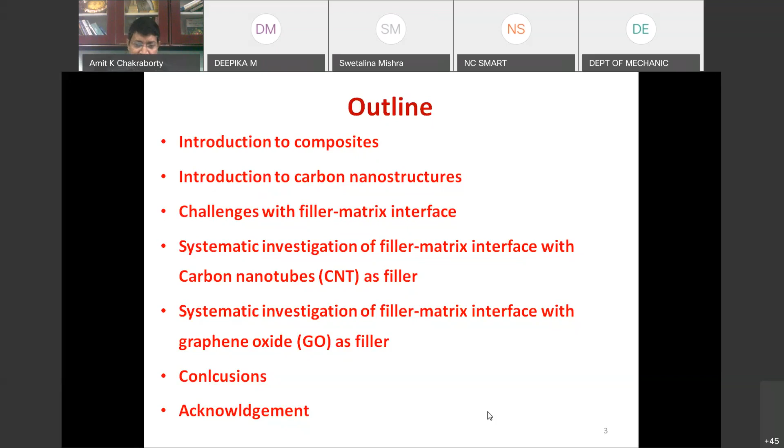Then next I talk about introduction to carbon nanostructures, because my lecture will include both carbon nanotubes as well as some other carbon nanostructures such as graphene and graphene oxide and their derivatives, so I'll briefly introduce them. Then challenges with filler matrix interfaces, briefly I'll discuss about them. Then I will have two full detailed experimental sections on systematic investigation of filler matrix interface with carbon nanotubes as filler, and another one on filler matrix interface with graphene oxide as filler. So two separate studies, one with CNT, one with GO.

Some conclusions and acknowledgement. So what are composites? If you read the textbooks, you will find that composites essentially are nothing but two or more dissimilar materials mixed together with a specific objective to enhance certain properties, right?

Basically, you mix two different materials together in such a manner that you expect the overall property of the new material to be increased for at least some property. It can be mechanical, electrical, thermal, anything. But because this event is for the mechanical engineering department, our focus essentially is on the improvement of mechanical properties.

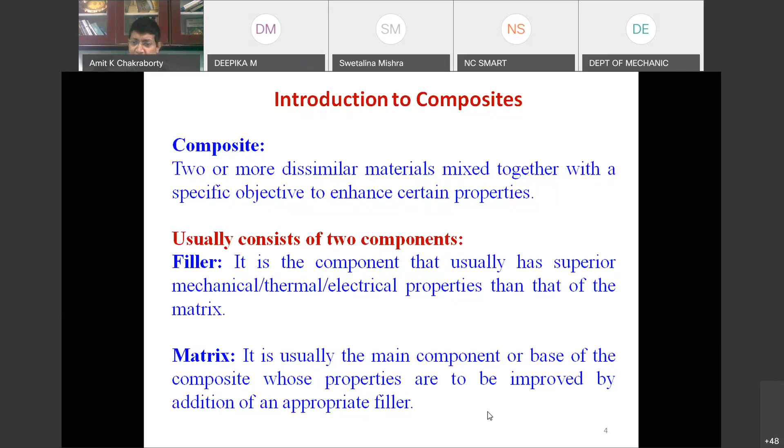When the focus is to improve mechanical properties, composites have two components. One is called the filler, and the other is called the matrix. The filler usually has superior properties in terms of mechanical, thermal, electrical, etc., which can be introduced into a rather inferior property material called the matrix, so that the overall property of the matrix is enhanced by the good effects the filler brings. So there are always two components in a composite: the matrix, which is usually the soft component, and the filler, which is usually the harder or stronger component.

That is the idea: you get improvement of the overall property of the resin by adding fiber. Now you might ask, the fiber component has higher tensile stress, so why reduce the stress of the fiber? That's because you can't afford to make everything out of fiber, and also fibers don't bond together themselves, so you can't make a structure just from fibers.

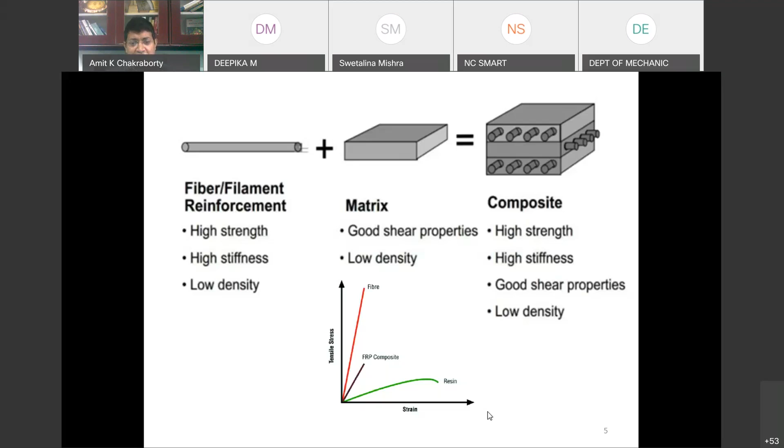You can imagine in our houses and buildings, concrete is used for making pillars and roofs, and in the concrete we use iron rods. But can you think of a pillar entirely made of iron rods? No, we don't, because that would require a huge amount of iron, which would be much more costly. So we save iron by using only a few rods in a mixture of concrete. That is the idea of making a composite.

Remember earlier I said that composite has two components: one is the filler and the other is the matrix. When the purpose of the filler is to reinforce the mechanical properties of the composite, then the filler is often known as the reinforcement. That is why the word reinforcement is more often used by mechanical engineers.

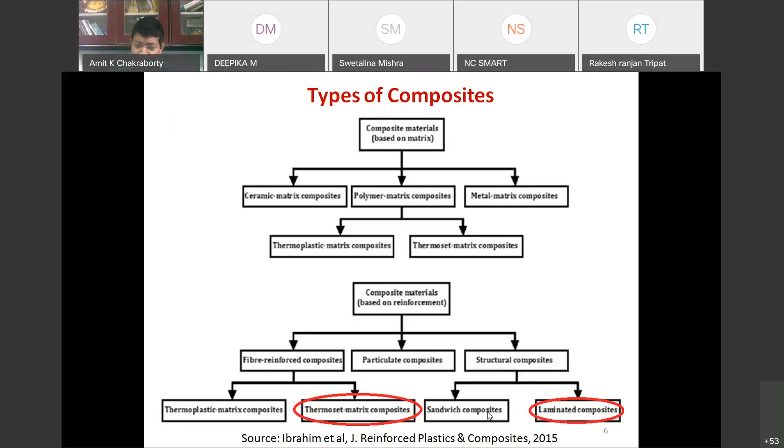We'll see it later. Also, at the bottom right hand side, I have circled laminated composites - I'll talk briefly about those too. For those who don't know what laminated composites are, I have a slide to explain it. Here you see a cartoon taken from the internet.

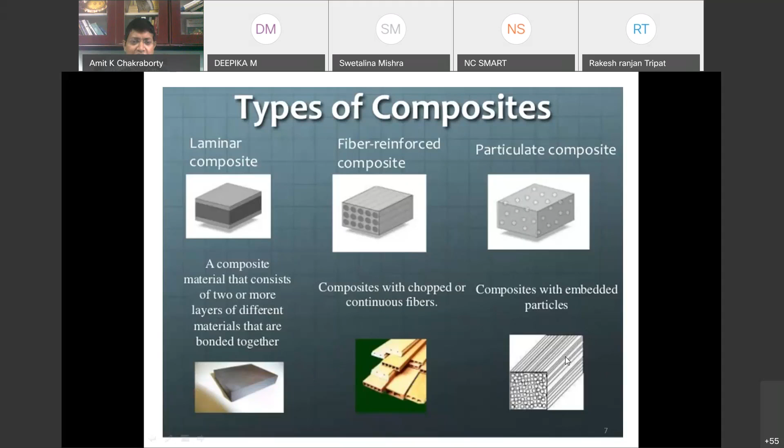On the right hand side, you see a polymer composite made of particles - the white circles or spheres are the particles introduced inside the matrix. Similarly, you can see more elaboration of the same thing at the bottom. This is how different kinds of composites can be thought of.

Lightweight composites, as I have already discussed, are the area I will be talking about in my lecture - essentially polymer matrix composites because they have lightweight. Then my focus is on thermosetting polymers, so I must tell you what thermosetting polymers are.

There are two types of polymers usually available in the market. The polymers we regularly use are thermoplastic polymers, because the moment somebody talks about polymer or plastic, it comes to mind that it must be very soft - it can be elongated, extended, pulled, made thinner or thicker, and melted very easily.

But all these properties are true only for thermoplastic polymers. These properties we expect of a plastic are not entirely true for thermosets, because thermosets are a special kind of polymer grown by cross-linking between two components. Thermosets usually have two parts: resin and hardener. When the resin and hardener are mixed in a specific weight-volume ratio and heated at a specific temperature for a certain duration, they form hard plastics such as bakelite.

Some of you might have heard the word bakelite - that's why I used the name. Bakelites are basically black colored plastics. Sometimes you might have seen the container of car batteries, 12-volt batteries - these are often made of bakelite. There are many other applications of bakelite.

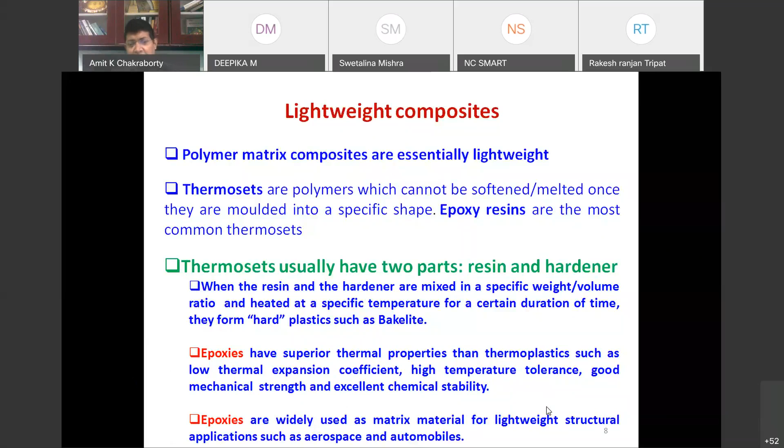Epoxies are also widely used as matrix material for lightweight structural applications such as aerospace and automobiles. These epoxy resins are the main component of the matrix used for making composites for aerospace and automobile applications. You can see in this cartoon several application areas mentioned for epoxy resins, and the global market by 2021 is expected to be 8.77 billion. I have taken this from this source.

You see can and coil coatings, automobile coatings, composites for wind turbines, which need a composite coating at the top to prevent natural erosion, powder coatings, marine and PC, adhesives, civil engineering structures, even electrical and electronics. These are the different market shares. So a lot of applications of these exist in the market for thermoset resin composites, and there is definitely scope to do research on these. More animation is coming with the details.

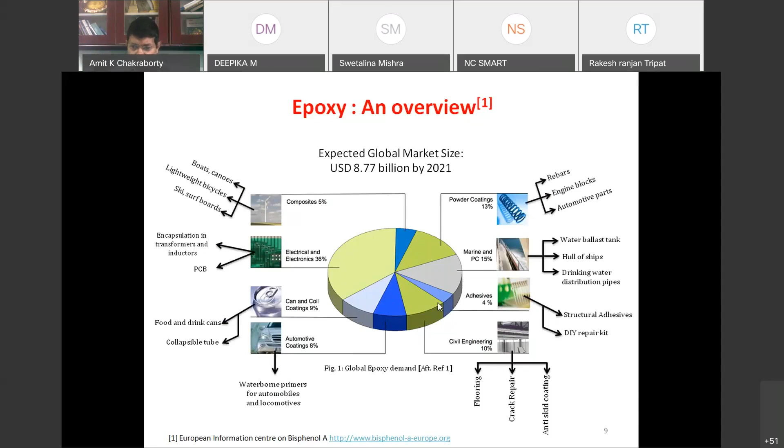So what are the prerequisites for a good filler? We have talked about the matrix, that is the thermosetting polymer. The prerequisite for a good filler is that it should be uniformly distributed within the matrix such that each particle is coated with the matrix. Just because you have chosen a good filler with extremely good mechanical properties, it doesn't mean that if you mix it in the concrete or in a polymer matrix, it will enhance the overall property. It doesn't happen like that.

Why? Because the filler has to be uniformly distributed within the matrix such that each particle is actually coated by the matrix. A lot of times this doesn't happen and then you will not get the desired properties. The filler should also make a good interface with the matrix so that the load can be transferred easily and efficiently from the matrix to the filler.

So another aspect is not only the distribution of the filler into the matrix, but also that the filler and the matrix should interact, they should talk to each other. If they are staying together but having no interaction, then what happens when you apply a load? The load is applied on the matrix, but since the matrix is not wetting the filler, the load is not transferred to the filler. So better wetting of the matrix with the filler is required. That is what the interface means.

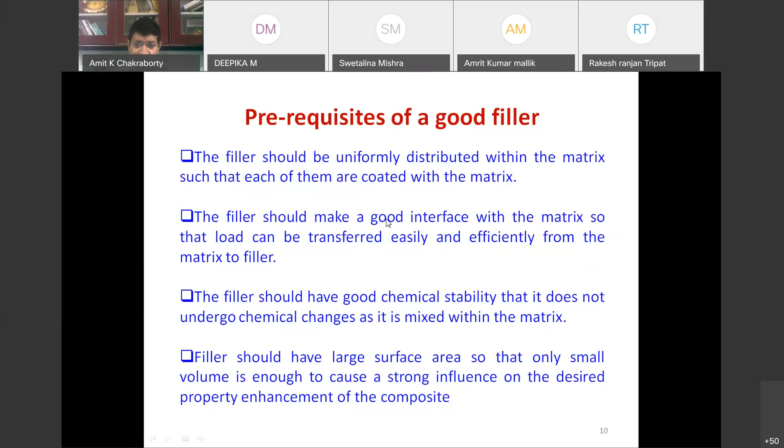The filler should also have very good chemical stability so that it does not undergo any chemical changes as it is mixed within the matrix. And the filler should have a large surface area, so that only a small volume of it can cause a strong influence on the desired property enhancement of the composite. That is actually the primary reason why we choose fillers in the form of small particles, fine fibers, fine flakes, not as bulk objects of big size. Fillers are always taken with a small size, and that's where comes the concept of nano filler.

So why nano filler? Because nano filler has this advantage, there is a size effect of nano. If you see this cartoon, we have this block, a cube, and now you cut it into pieces. As you cut it into pieces, the volume of the cube doesn't change.

If you add all the volumes of these individual 8 cubes, the volume will be the same. But what about the surface area? Surface area is significantly increasing as you cut down. So that basically means that if you choose a filler of small size, it is likely to get more surface exposed to the matrix, so there is a possibility of better wetting of the filler surface with the matrix. That is the reason that in the last 20, 30 years, most composite research has focused on nanocomposites rather than just composites.

And also it is partially due to the discovery of several nanoparticles. The field of nanotechnology also evolved a lot in the last 30 years. So as many new nanofillers came into existence, people became more interested in using nanofillers in their research.

So the right hand side graph shows the same thing in a different way. On the x-axis is the particle size of a filler, and on the y-axis is the ratio of atoms in bulk to atoms on the surface. The bulk to surface number of atoms is increasing as the particle size increases. So as the particle size is smaller, the surface atoms compared to bulk atoms increase. If the surface atoms keep increasing, you get a large increase in surface area of the particles, so you get higher probability of wetting of the filler with the matrix.

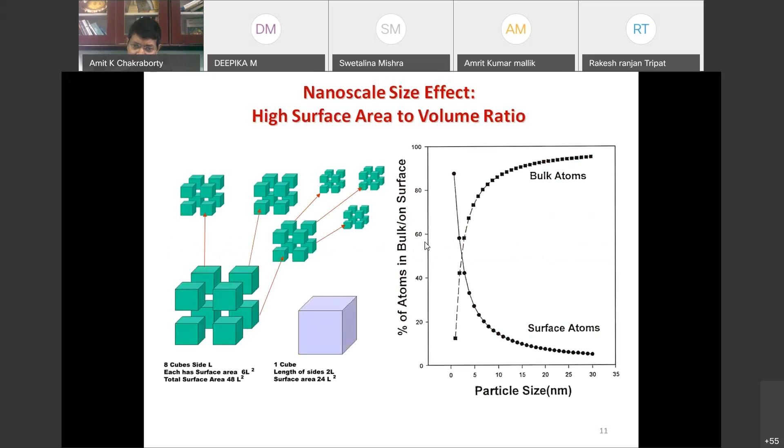So, introduction to carbon nanostructure. As I have already spoken to you, my topic is about carbon nanostructures, not just carbon nanotubes, fullerenes and graphene.

Now, if the fullerene is coated with multiple shells, imagine one fullerene and then another sphere covering it, and another sphere covering that, so it's a multi-wall or multi-surface fullerene. That is basically a carbon nano onion, which is also quasi zero-dimensional. Its size is about 1 to 5 nanometers, with multiple layers of carbon spheres one inside the other.

Then the next picture is of carbon nanotubes, which are one-dimensional because their length is in the order of several microns, but the diameter is only a few nanometers. At the bottom you see graphene. Graphene is nothing but a carbon nanotube which is opened up, so it's a flat surface where carbon atoms sit in a hexagonal manner.

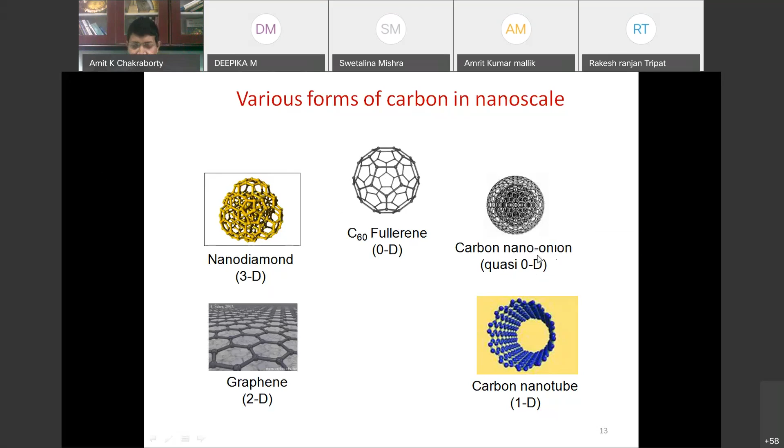And the first one is the nanodiamond. Diamond is a 3D structure, a tetrahedral structure, and this diamond structure can also be found in the nanoscale - nanodiamond. Another interesting thing is I have worked on all these materials. I have published papers on fullerenes, nanodiamond, carbon nano onions, CNTs (carbon nanotubes), and now graphene.

So how have these things evolved? That is what this slide shows. I am very interested to show those who don't know the history of carbon nanotube or carbon nanostructure research. It all started in 1980 with the discovery of carbon nanotubes by Iijima, although it was not so well recognized. But in 1985, C60 fullerene was discovered by Kroto et al., and they got the Nobel Prize in 1996 for this discovery.

1990, another discovery happened where fullerene synthesis was done at large scale. 1991 was a major discovery again, as Iijima discovered carbon nanotubes, multi-wall nanotubes. 1992, Daniel Ugarte discovered carbon nanoonions. 1993, again Iijima and Bethune independently discovered single wall carbon nanotubes.

2002 is a big year for the research of carbon nanostructures, because multi-wall carbon nanotubes were first grown by the CVD method, which was the first step for popularizing carbon nanotube research. Earlier, carbon nanotubes used to be prepared by methods which produced very small quantities. I remember my previous speaker mentioning that carbon nanotubes are very costly, right?

So I can tell you that when I started my PhD in 2002, my supervisor had bought 1 gram of carbon nanotubes at a price of £1,000, which is like 100,000 Indian rupees, that is 1 lakh rupees for 1 gram. He told me specifically, you cannot spend more than this 1 gram of carbon nanotubes for your entire PhD. That's all I give you, don't waste it. Now, in my group, I buy 1 kilogram of carbon nanotubes at a price of 30,000-40,000 rupees. So, 1 gram to 1 kilogram - see the difference in 20 years.

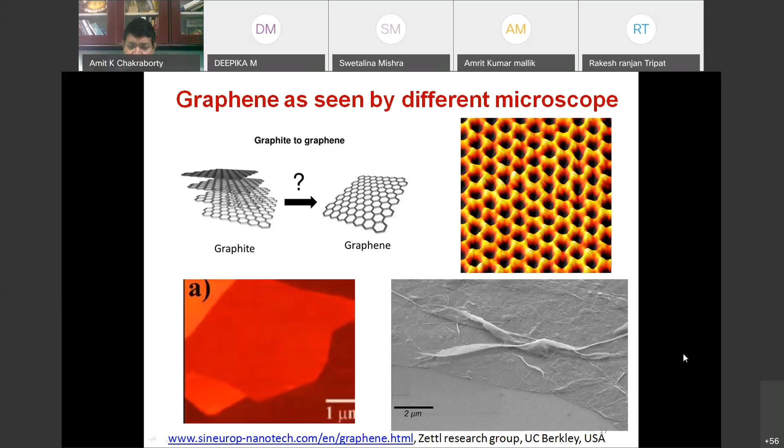Here you see the same thing, a semi-transparent layer of graphene. When you isolate a single or a few layers of graphene, they are actually transparent. You can see this semi-transparent nature of the graphene in the scanning electron microscopy image here.

So why are these interesting? It's because of their properties. Graphene and carbon nanotubes are both very interesting for research because of properties such as energy gap.

Carbon nanotubes have an energy gap, inversely proportional to their diameter, which means some carbon nanotubes can be insulators, some can be semi-metallic, some can be metallic, and some can be semiconductors, all depending on the diameter. So a material whose diameter changes its energy gap, changes its conducting properties.

And for graphene, the band gap is zero. I'm sorry, I don't have a slide to show why graphene has a zero band gap, but basically graphene is a semi-metal.

Electrical transport properties are also very good, because for carbon nanotubes, electrons can only travel along the direction of the tube. For graphene, electrons can only travel along the surface of the sheet. There is no third dimension, so electrons cannot scatter on any other plane except the plane of the graphene, which makes both very good conductors.

That is why they can also carry very large current density, 10 to the power 9 ampere per centimeter square. Diameter and length of CNT is about 100 nanometers maximum, and length can be up to 100 microns.

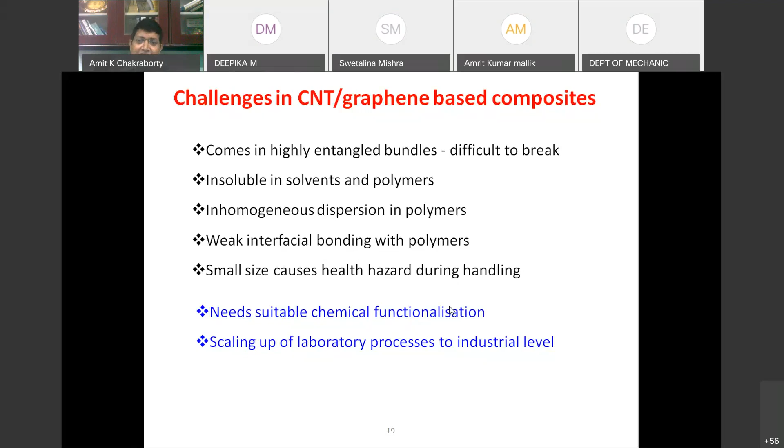So how to overcome these challenges is essentially by chemical functionalization. This basically means you have to do some chemical treatment to the graphene or CNT so that they can readily interact with the matrix in which you want to put them, so there is good interaction and good adhesion between the polymer and the filler, so their properties can be instilled into the composite.

So what is the knowledge? Lot of research is happening, but in the literature you will see many polymer composites reinforced with graphene or CNT are based on thermoplastic polymer. The reason is thermoplastic polymers are very easy to improve. There is no cross linking, so they are more chain-like, flexible molecules. If they are flexible, by adding some filler you can control the flexibility, that is, improve the properties.

But thermosetting polymers are anyway quite hard and cross-linked, so it is not easy to improve them further unless you have really good property enhancement by good interfacial adhesion and good dispersion. That is why for thermosetting polymer-based composites, the enhancement reported is not great, within 30%, 50%, etc. Not great. But in thermoplastics, you see 200, 500% improvement in mechanical properties of polymer composites by incorporation of carbon nanotubes and graphene.

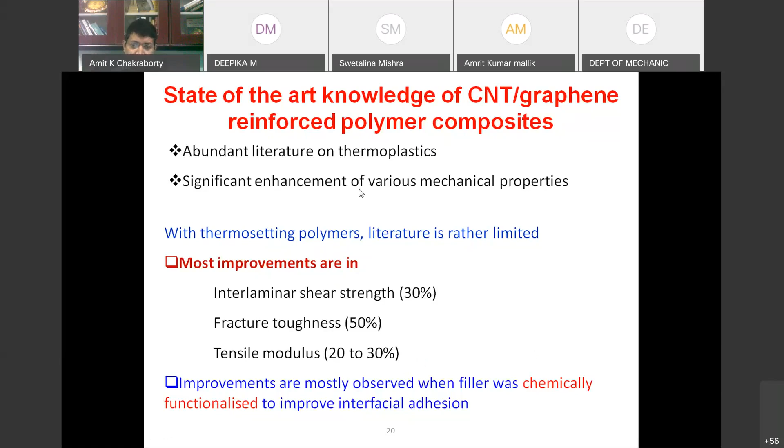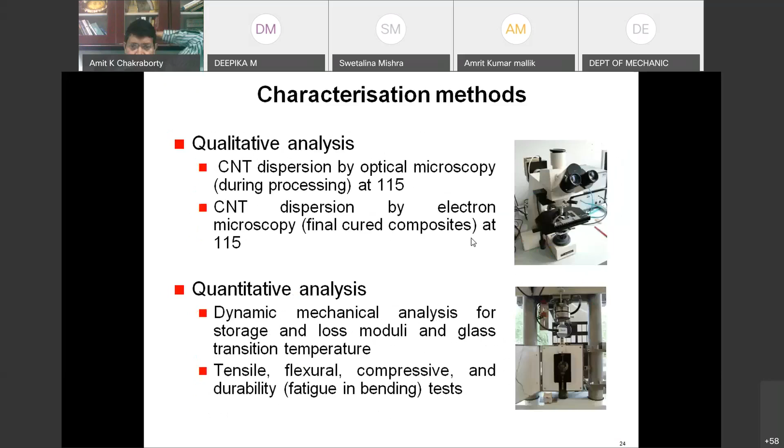So what is our approach? We investigated in detail the big question we were trying to address: in the literature, many people reported that CNT can be introduced into polymers to enhance their properties, but we were struggling. I had been working for nearly 1.5 years trying to get any improvement in mechanical properties in spite of adding carbon nanotubes. It was really frustrating. What is going wrong? So many groups report they are getting enhancement. So I thought, let me do a very bottom-up approach.

I studied from the bottom. We used a very small content of CNT, 0.2%, so that the CNTs themselves are not in contact with each other, and then dispersed them in an epoxy resin. Then we simply used microscopic methods, optical microscopy, to study their dispersion properties. Here are the dispersion studies. This work was published in 2011, and it is highly cited.

This work has been cited 67 times, and it basically shows how difficult it is to disperse carbon nanotubes.

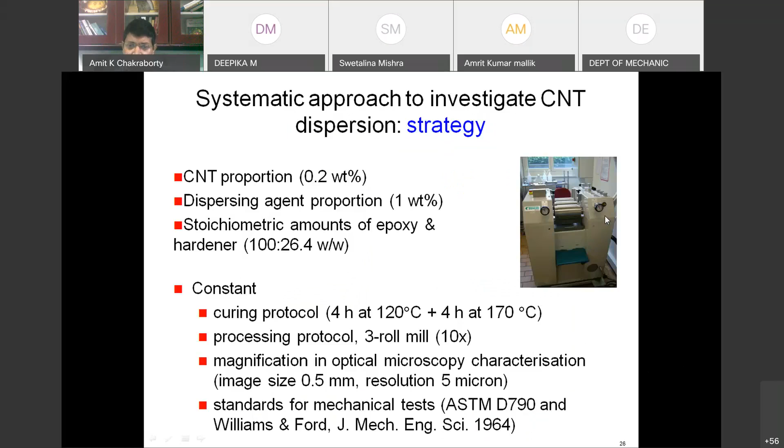I was hoping that if I have a very good dispersion, then definitely my product will be very good and I will see improvement in the mechanical property. But when we tested the mechanical property, we still did not see any improvement.

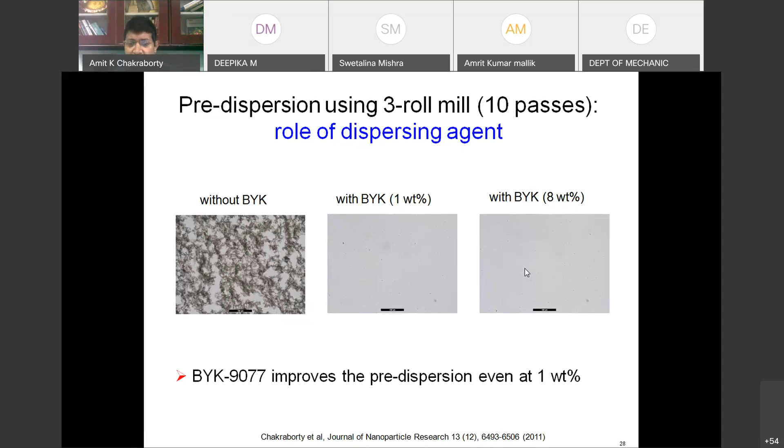Another try we did with a larger amount of BYK, 8 percent, which is also very good. But we cannot use too much because these surfactants are basically soft materials. If you use too much, they soften the material and your mechanical property will degrade rather than improve.

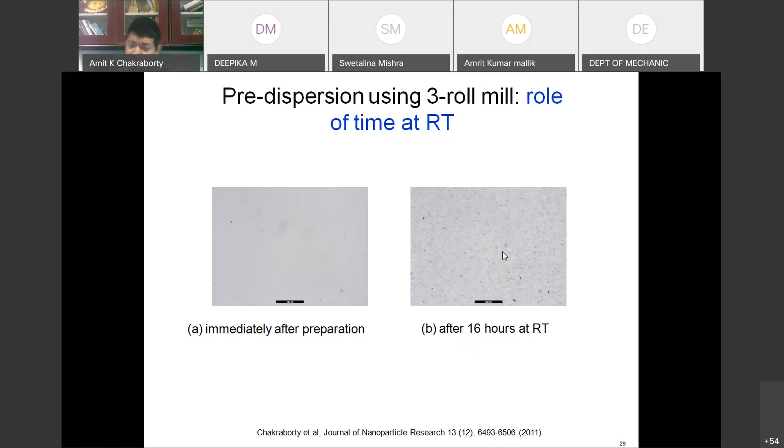We also studied the influence over time: immediately after preparation of the dispersion, and after leaving it for 16 hours. What we observed is that after 16 hours, some dark particles appear. This means that mixing them is not enough; you also have to maintain the dispersion. Mixing and maintaining are two separate things. You make a very good dispersion, but you have to sustain it for a long time. That is not happening, because after 16 hours, we see some particles being formed.

Similarly, we also studied the role of temperature. If you do it at room temperature immediately after preparation, versus heating it at 80 degrees Celsius after 1 hour, you see some particle formation. Why did we study the influence of temperature? Because these resins have to be cured with a hardener at certain temperatures, which can be 80 degrees or 120 degrees for several hours.

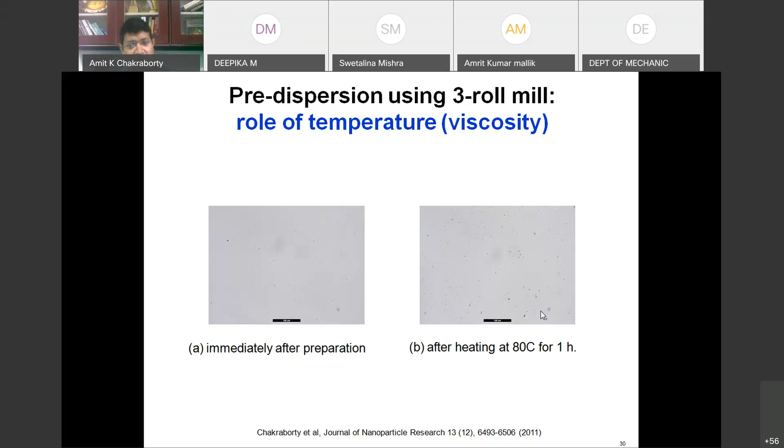So we must ensure that if we have a very good dispersion of the CNT in the matrix, the dispersion remains stable over the entire curing process, for 6 or 8 hours at 120 degrees Celsius. If that is not happening, then we are unlikely to get any improvement. That is actually what we found: after some time, if you heat it, particles start to agglomerate. Another study looked at the influence of both temperature and time together.

Again, you see, as we heat at 120 degrees Celsius, even at 5 minutes, we see some agglomerate formation. These black particles are agglomerating, even immediately after mixing at room temperature.

So what is this? As soon as you add the hardener, there are two parts. Initially, you mix the resin, mix the nanoparticles in the resin. Then, after you have achieved very good dispersion, you have to add the hardener, which is a different chemical altogether. Once you add the hardener, the system changes, the equilibrium of the dispersion of the particles changes. So this is what we have seen: even immediately after mixing, as soon as you add the hardener, even at room temperature, the dispersion is changed.

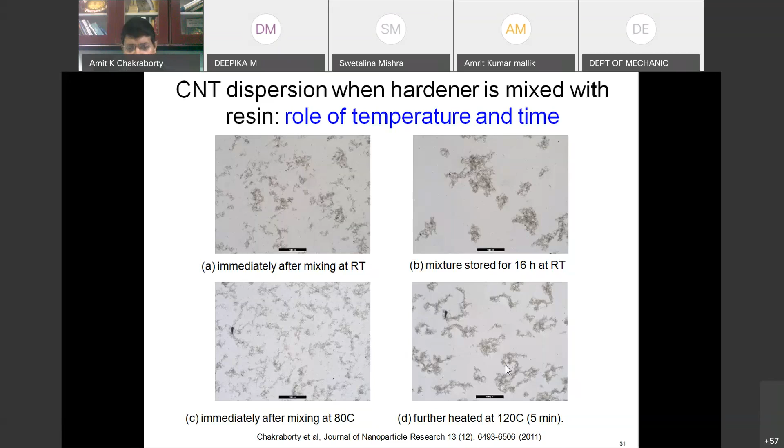After 16 hours, it is even worse. See large chunks of materials and large regions where nothing is there. This is slightly better at 80 degrees, but again slightly worse at higher temperature. Why is higher temperature worse? Because as you heat, the resin viscosity lowers. So if the resin viscosity drops, the particles become more mobile and they can go together and find each other, make friends with themselves. That's how they re-agglomerate. So these are the challenges that one needs to address.

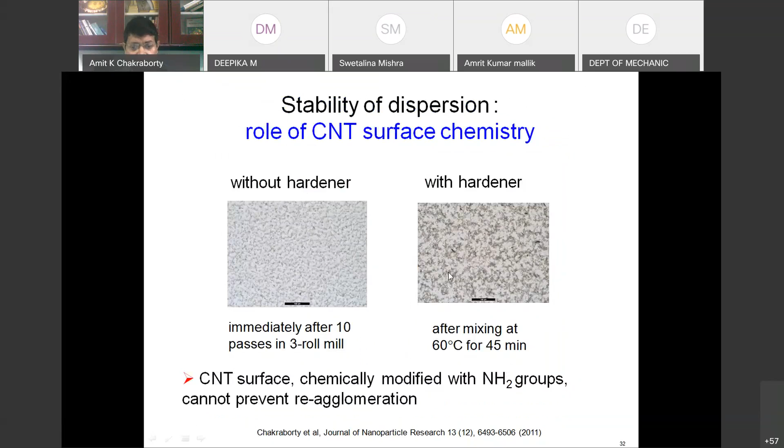So further, this is again a study on the adding of the hardener, as soon as you add it, without hardener and with hardener. This was done with modified, chemically modified aminated carbon nanotubes, where NH2 groups were added to the carbon nanotubes.

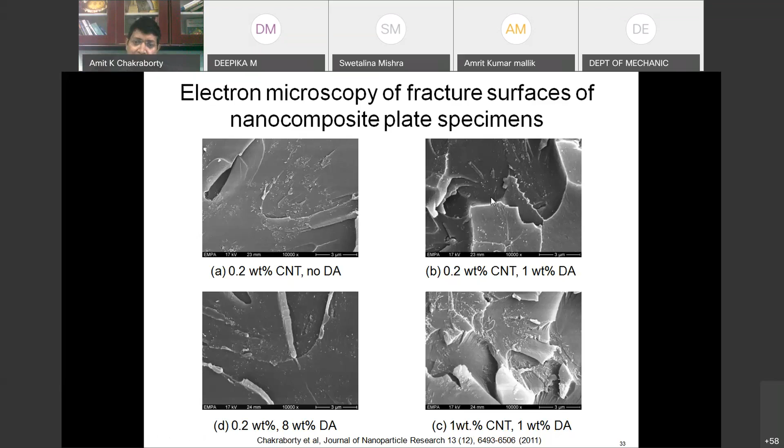Sharp white spots basically indicate that the CNTs were also damaged. There are no large, long CNT particles. CNTs were long particles, long hairs were there, right? But here in the fracture surface, we do not see many long hairs. The reason is during the mixing process, we have also cut down the long hairs into very small particles. So the impact of fiber reinforcement has also been compromised. The fibers are no more fiber; they have been cut into smaller fiber-like particles, and that is also a problem which did not help in stopping the crack propagation or fiber pulling out.

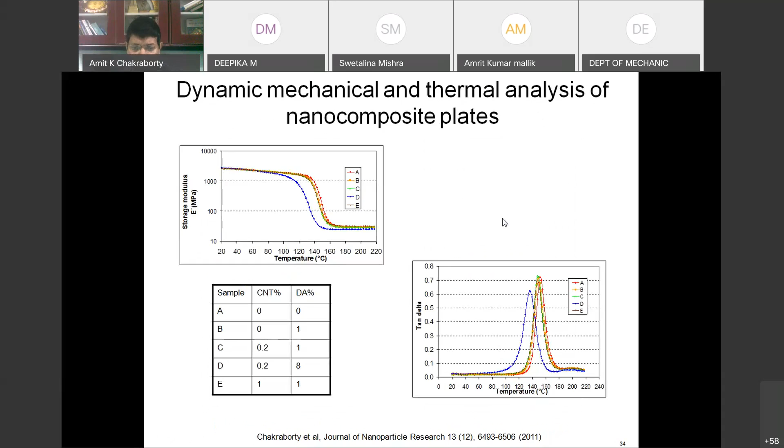I'll skip this part, which compares the storage modulus, and you see there is hardly any improvement in the properties, and the same applies here. No more improvement. So no properties have been improved.

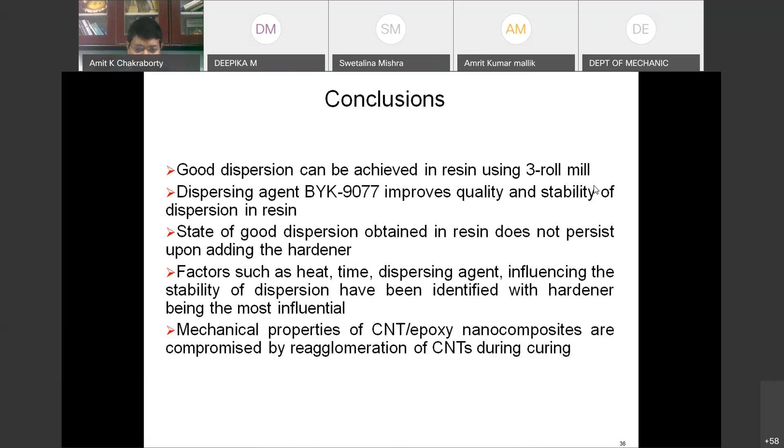In conclusion, we found that dispersion and the interaction are the most important parameters before somebody can expect an improvement of the mechanical properties. Just mixing a good filler is not enough. How you mix, and whether the mixing is stable over the entire curing process, is very important to determine the mechanical properties of the composite. We have also used the same concept in making a laminate.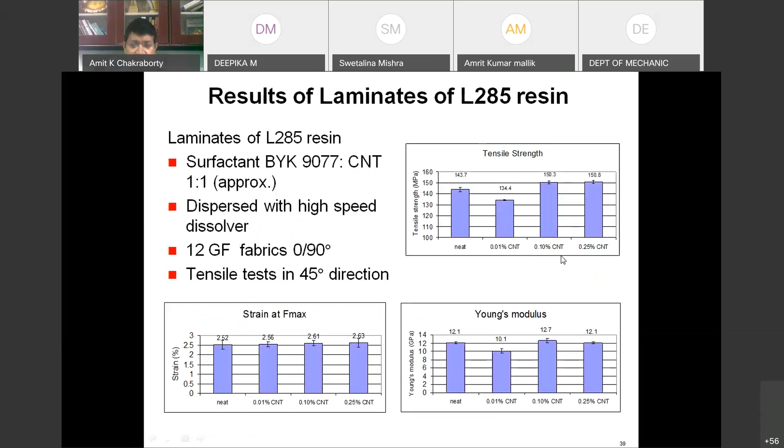I am again skipping these details, going to the conclusion here. The conclusion slide shows that in the laminate, we see only a 5% increase in the strain at maximum load, 13% increase in the flexural strength. In the tensile strength, we get only 5% increase, not even 13%, but at least in the bending mode we get a little extra improvement, but not much.

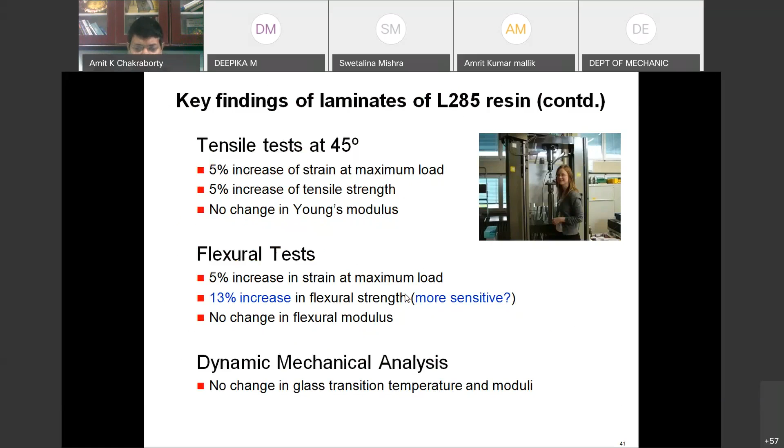So basically, there is a problem of dispersion. Unless we settle the problem of good dispersion and good interface between the matrix and the polymer, matrix and the filler, this improvement is not going to happen.

So that is the reason why in 2010, when we started this activity with graphene, we decided that instead of using plain graphene, we would first modify it with a chemical bond that would interact efficiently with the resin, because most resins are cured with an amine-based hardener. We thought if the graphene could be chemically modified with an amine group, then the graphene filler itself would start acting like a hardener, making a very good bond with the resin.

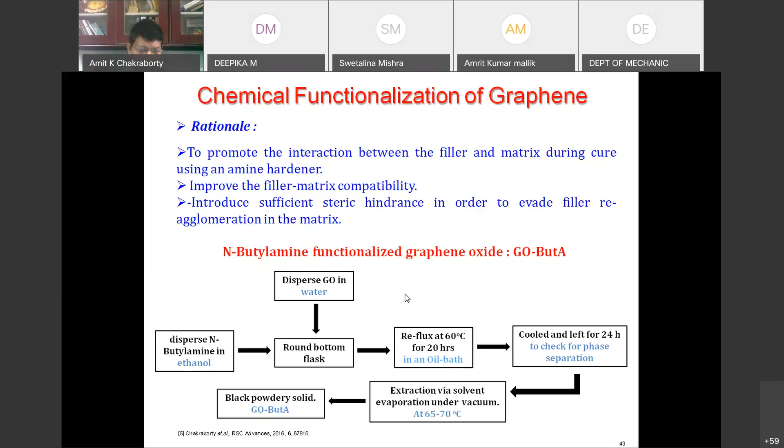With this motive in mind, we developed a butylamine functionalized graphene oxide. These are the few steps showing how the graphene oxide was prepared, and from graphene oxide we prepared the amine functionalized graphene oxide, which has amine groups attached on its surface.

This can be thought of schematically like this: you have the graphene oxide at the top, and after the butylamine treatment and refluxing, what you get is a graphene oxide sheet having areas where we have the butyl amine group. This amine group essentially acts like the amine present in the hardener used for curing the resin. That was the purpose of attaching amine groups to the surface of the graphene oxide.

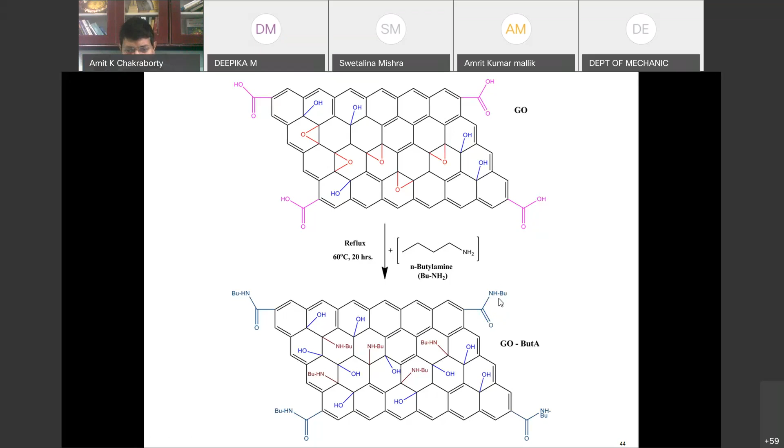And then we thought we'll conduct an investigation of the interfacial adhesion of this butylamine modified graphene oxide with the epoxy resin system.

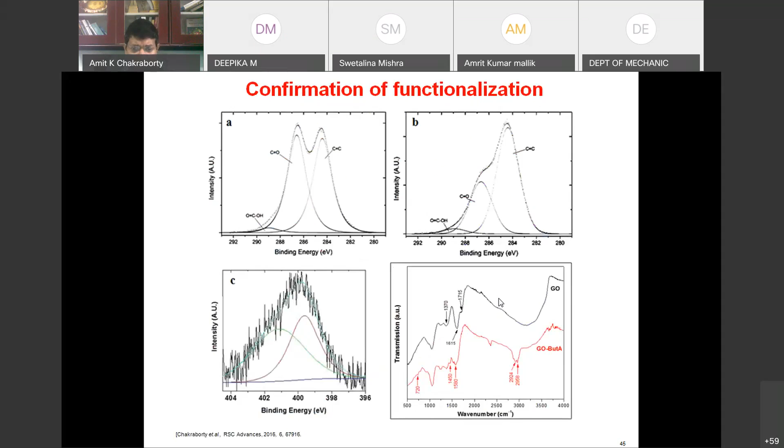So here are some characterizations. This work was published in RSC Advances in 2016. I'm skipping this part, as I think for mechanical engineers this is not important. What is important is that we have been successful in producing a chemically modified graphene oxide into an amine modified graphene oxide, and we use this aminated graphene oxide.

You can see this slide, I like it, I'll spend a little time here. By adding the graphene oxide through chemical treatment, we have seen a significant improvement in the dispersion of the graphene oxide in various solvents. That was an indicator that if we use this material instead of simple graphene oxide in epoxy, it is likely to have better interaction.

You can see on the right hand side the pictures after several weeks. On top, it is immediately after making them; at the bottom, it is after several weeks. And you see on the right, the colors of the solutions are intact for many of the solvents.

For example, for water it is partially intact, for ethanol it is not, for acetone it is partially intact, for DMF it is fully intact, for hexane it is not, for toluene it is not. But with GO, it is even worse, none of them are stable except water, because GO forms a very stable dispersion in water. No other solvent keeps GO well dispersed.

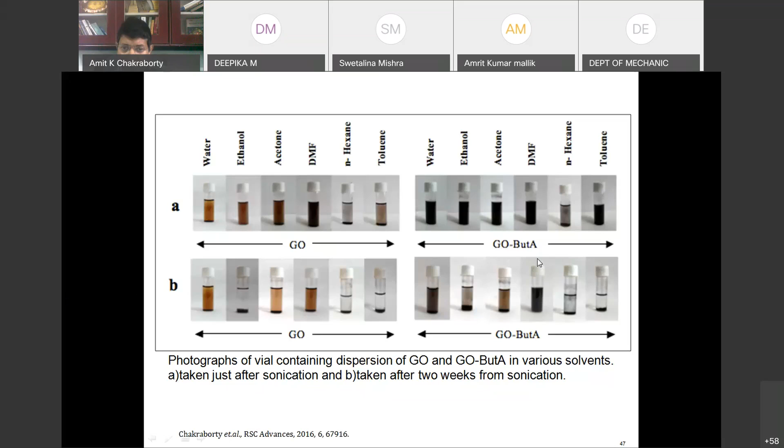I'll skip this. Let us go to the final discussion of how we investigated the interface of the modified graphene. This is the investigation of the GO filler-matrix interfacial interaction. Earlier I presented how we investigated the interface of carbon nanotube polymer composites; now I'm going to talk about how the graphene oxide filler and epoxy matrix interface was investigated by us.

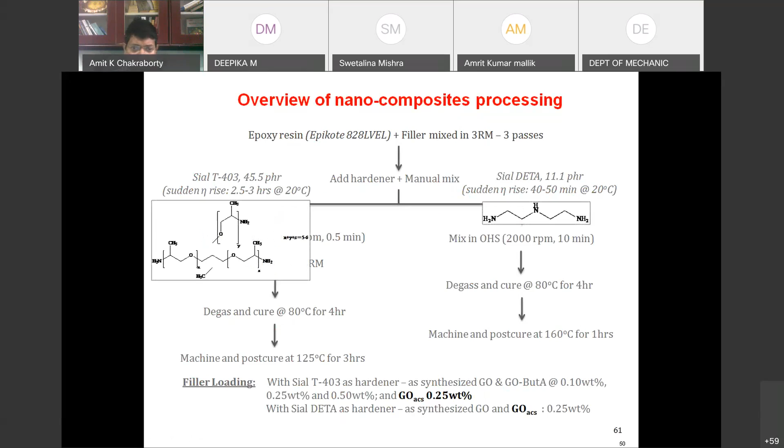Excuse me. Hello. Went up. Okay, okay, sure.

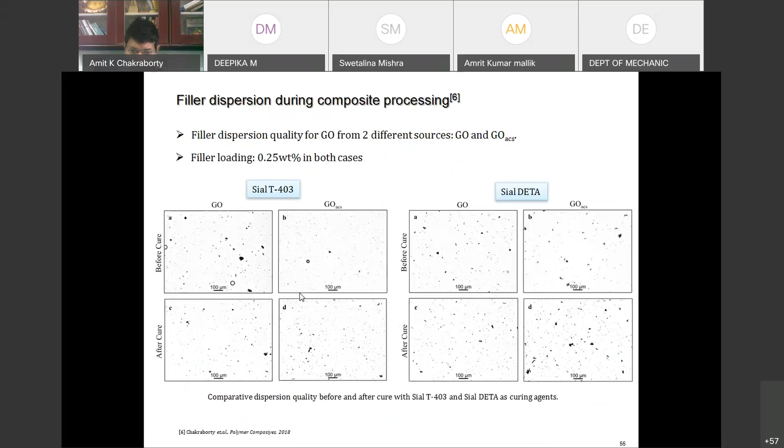Okay, since I have started very late and also taken too long, I think I'll have to cut this part short, so I'll go straight to the conclusion of this study.

So the conclusion of this study is here. What we have observed is that the butylamine modified graphene oxide fillers were slightly better in terms of enhancing the interfacial interaction with the polymer, with the epoxy resin.

However, since we studied two separate systems, one with fast curing and one with slow curing, we found that the improvement from graphene oxide modified with amine group was more prominent with the slow curing system. So if you allow sufficient time for the reaction to occur, you are likely to get more benefit from the interfacial interaction due to chemical modification of the filler. Otherwise, even if you modify the filler chemically, the benefit is not visible if the system is very fast curing, because there isn't enough time to act.

Thermal stability of the nanocomposites is influenced both by the interfacial interaction. We have also found that thermal stability is influenced by the interfacial interaction, and we have seen that fracture toughness is not only dependent on the interfacial interaction, but also internal stress development occurs.

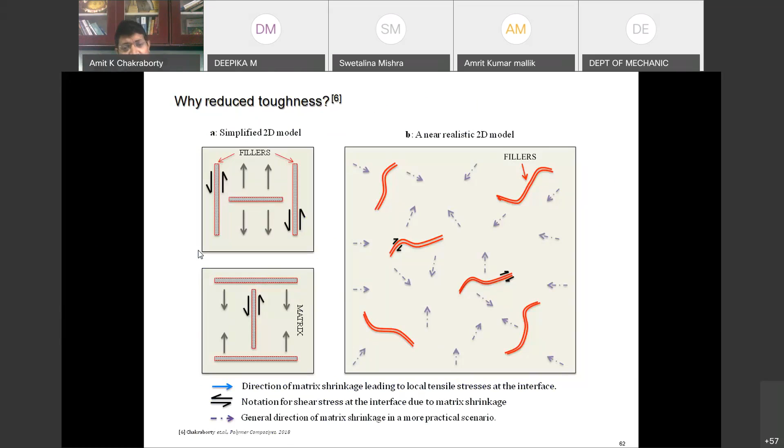This slide basically shows that internal stress can be generated in opposite directions, which can oppose each other, as a result of which, even though we have improvement in the interfacial adhesion, this does not always translate into improvement of mechanical properties.

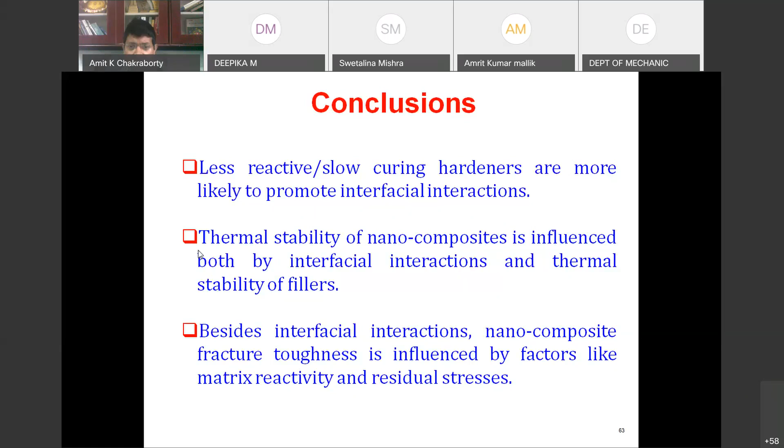So in short, the conclusion we found in both studies is that even if you modify the filler, even if you start with an extremely good filler having extremely good mechanical properties, there is no guarantee that experimentally the property of the composite material will be enhanced, unless you are very very careful in modifying and looking at the details of how fast they are curing, how well dispersed the system is, how the particles are well dispersed, how stable the dispersion is, etc.

So I acknowledge the people who contributed to this lecture. The manpower, essentially my two most important students: Miss Tia Klim, who is now an application scientist in Alstom AG in Baden, Switzerland, and Dr. Shobik Chakraborty, who did his PhD under my guidance and is now a postdoc in Technical University Clausthal in Germany. My collaborators, mostly former collaborators from my former employer, are Professor Giovanni Terrassi, Dr. Michel Barbezat, Dr. Andreas Brunner, all from my former employer EMPA in Switzerland, and also collaborator Professor V.R. Dhanak from University of Liverpool, United Kingdom. Funding for this entire work was mostly done by EMPA, Swiss Federal Laboratories for Material Science and Technology, and the Indo-Swiss Joint Research Program.

Thank you, and any questions please? Any questions from the participants?

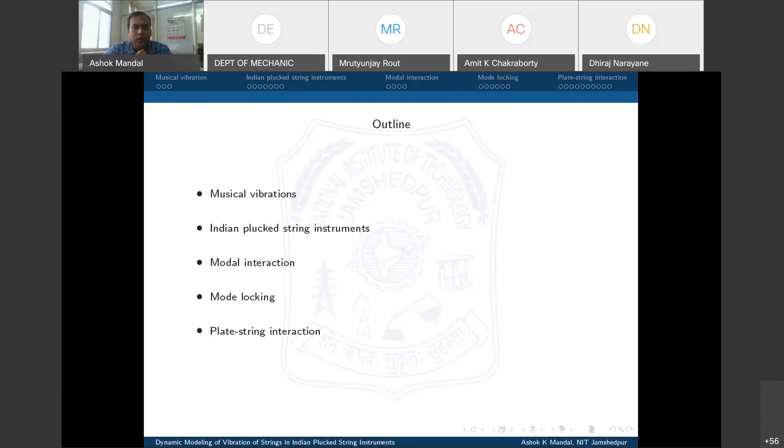First of all, we will talk about musical vibrations - what is called musical vibration. Then I will talk a little bit about Indian plucked string instruments. Then we will go for modeling it. In the beginning, we will talk about modal interaction in string modes when it is vibrating, then mode locking, one phenomenon I'll be describing, and then plate-string interaction.

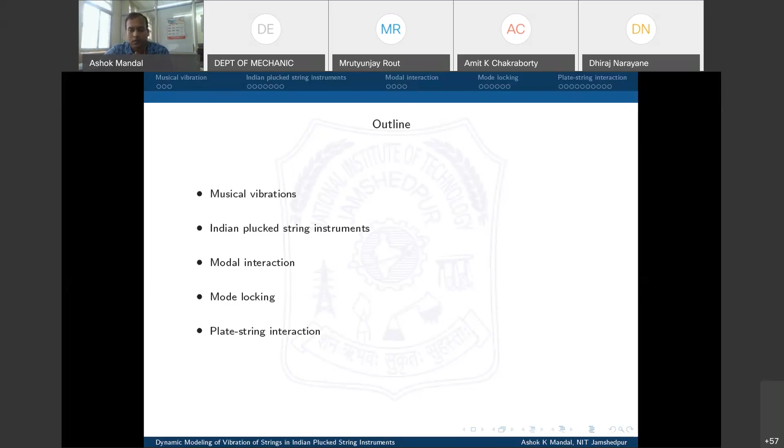So the main source of vibration in a musical instrument is the string. We pluck the string, it vibrates, and that vibration energy gets transferred to the plate - plate meaning the top on which the bridge is situated. We'll show you the figures, and the interaction between the string and that plate is the last part of our discussion. Okay, so first let us discuss this - what is called a musical sound?

First of all, if I say any sound - you just tap here, there is a sound, and this sound consists of many frequencies. We are not saying that this sound is a musical sound. Why? Because it has many frequencies, and all the frequencies are not integral multiples of the fundamental. So there is a fundamental frequency, the lowest natural frequency. If all the frequencies are integral multiples of the fundamental frequency, then only we say that this is a musical sound.

So when we study vibration of a string, in the beginning of our study, this string is fixed at two points and has no bending rigidity. Then if you strike it, it will have many frequencies, and all the frequencies are integral multiples of the fundamental frequency. So here I have written the natural frequency of a stiff string as omega n. Omega n means n denotes any mode, so that mode's frequency is n into omega 0.

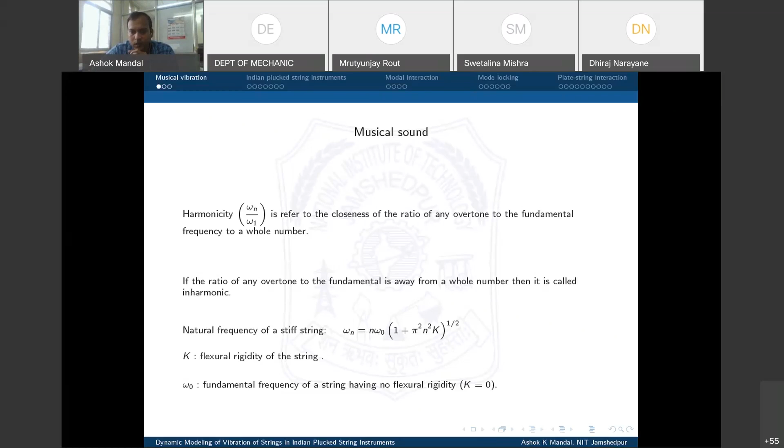Let's talk about a book written by Swami Rama on Indian music. He says the human brain can identify 66 frequencies in one octave, and among these, 22 frequencies are musical, which we call shrutis. In Indian classical music, there are 22 notes called shrutis, and among them we generally know only 7 notes: sa re ga ma pa dha ni sa. If you take the minor notes, that becomes 12 notes.

In Western music, there are 12 notes in one octave. This is natural to us; our brain can naturally identify these frequencies. But can you imagine, we generally cannot separate sounds like sa re ga ma in a piece of music and tell which one is sa and which is re, because we have not trained our brain. Musicians train their brain so they can identify these frequencies, and rare are those who can identify all 66, or even the 22 musical frequencies.

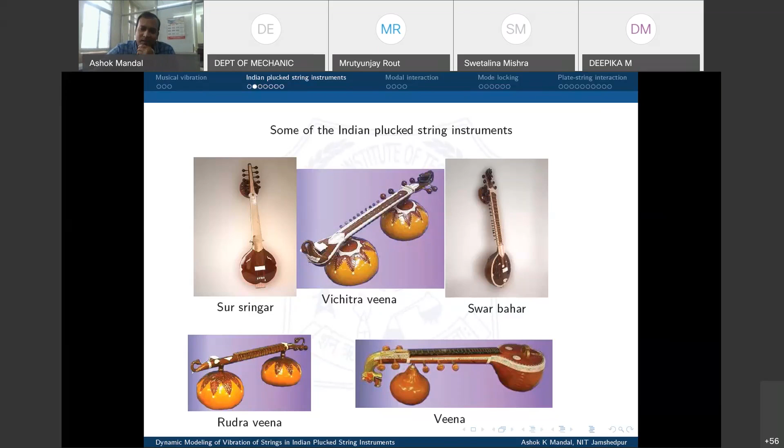Their construction is very much complicated compared to the construction of these instruments.

Now let us listen to the sound of these instruments. The first instrument we are showing is a tanpura, a four string tanpura. There are four strings and no frets. Now let's play the sound.

One can see the richness of the sound. And let us play this sitar.

So what is the difference of these sounds compared to the Western counterparts? The differences have been reported by several researchers, one of them being Sir C.V. Raman, who reported it in 1921, and other researchers after him. The main characteristics of these plucked string instruments, especially sitar, the sound is characterized this way.

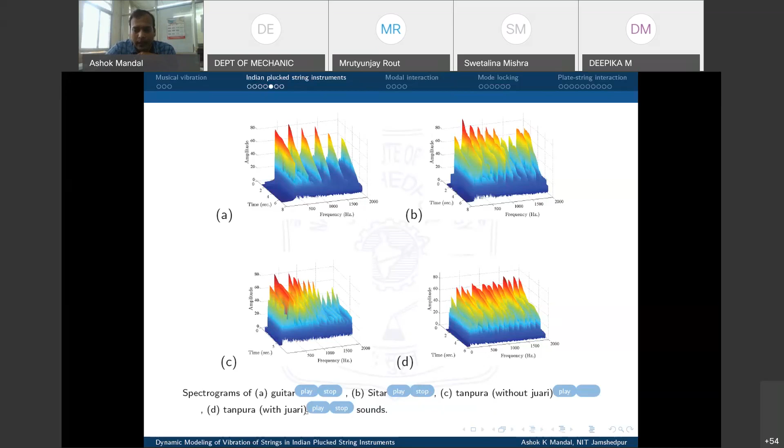So in this work I'll be doing that. Again, the same sitar and guitar sounds we analyzed: we see how the amplitude is changing with time for the guitar sound. You see the amplitude is decaying monotonically from here - there is no interaction between modes.

But here for a sitar, all the modes initially - for example this frequency was initially not there, then it comes, then goes down, and again comes, reaching some significant amount.

Another thing: when we do the FFT of this and plot it, you can see it is not just a peak but a distribution. That means there is some modulation in the frequency. So these are all experimental findings from the sounds of sitar and tanpura.

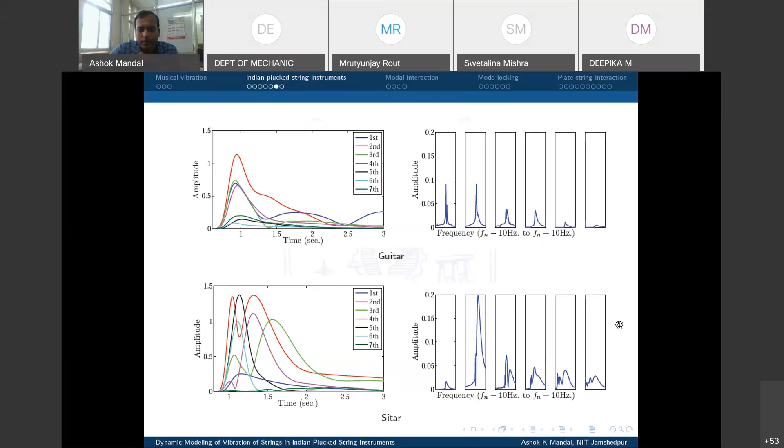Now our work is to model the vibration of the string against this bridge, which was not there for the case of guitar. For the guitar, both ends are pin ends, and we can study the vibration like a string between two fixed ends. But in this case, the string is not vibrating against two fixed points. At this end, when the string goes up, the end point of the string moves from this point to some other point.

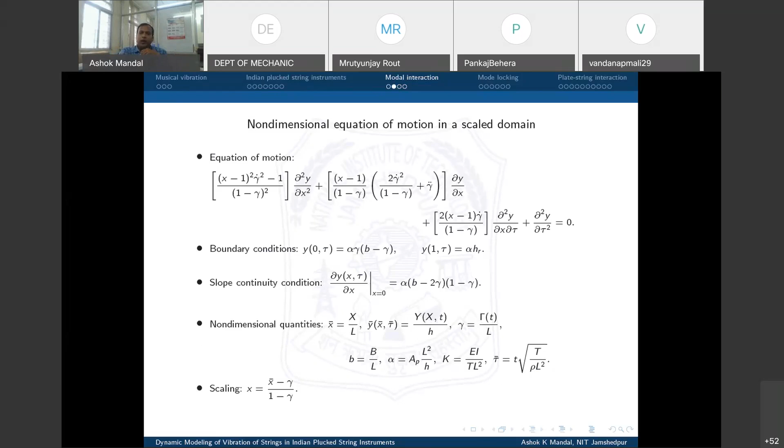After modeling it and getting the equation of motion, we wanted to verify the natural frequency of the system. So we linearized the system and obtained the natural frequencies, which are still harmonic — all the frequencies are integral multiples of the fundamental. But the mode shape is different. I have written the equation for the mode shape function, and here I plot the mode shape.

Then we look at the nodal points — this is one node and this is another node, obviously two nodes. The distance of this node from x equals zero is given by this expression. When I got that expression, I found this part is a constant, but this quantity depends on beta n, the modal coordinate of the system, which changes with time. That means the node point's distance from x equals zero is always changing with time.

That generally does not happen with simple string vibration. What happens in simple string vibration? The node points are always fixed. That is why they are called node points.

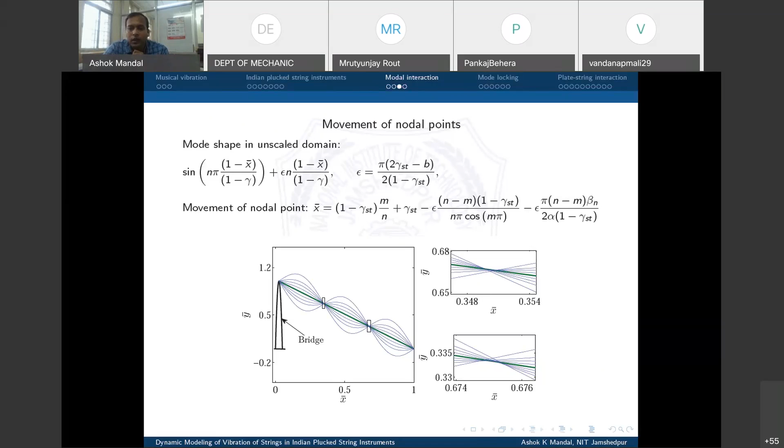Then we solved the equation numerically, for 3 modes, and we gave an initial displacement condition to the first mode. That means we excited only the first mode, and you can see the other modes come into the picture due to the nonlinear interaction between modes.

So here you can see how, in the beginning, we said there are a large number of overtones. How do these large number of overtones come? Initially you strike the string, you give energy to some particular modes. If the system is linear, it should vibrate with those modes only. But this is not a linear system, it's nonlinear, and there is some modal interaction between them.

Due to that interaction, other modes also appear, and that violates the Young-Helmholtz law, which was first observed experimentally by C.V. Raman and reported by him. Now you can see the mechanism behind why this law is violated, and we have all the modes present in the system which were not initially excited.

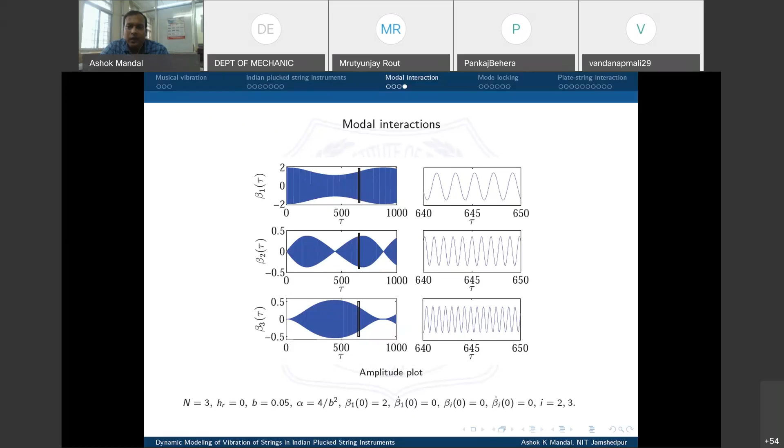I am not saying you should know all these equations, just for presentation I am showing this. These are the slow flow equations which I got from the method of multiple scale analysis, and these amplitudes and the change of amplitude shown here represent the dynamics of the change of amplitude with respect to slow time.

Then we verified these slow flow equations. We plotted the slow flow equations with a red line, and the numerical solution of the actual equation with a blue line. We found that they match exactly, meaning our slow flow equations are correct.

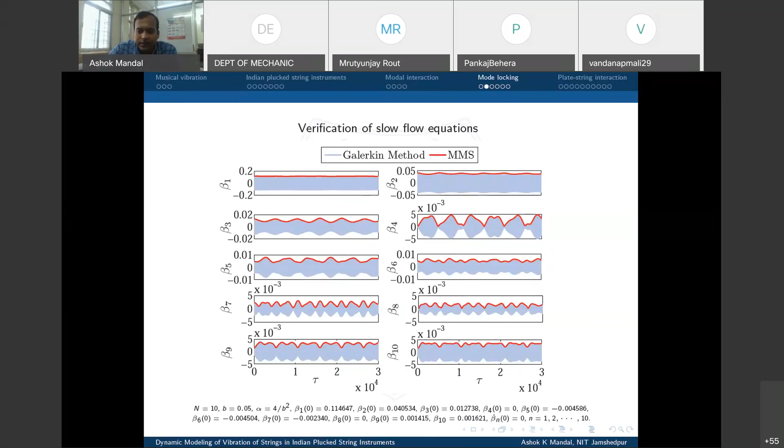Here I have shown the slow flow equations only for two modes to simplify the system. Then we converted these slow flow equations into polar coordinates, and wrote the same slow flow equations in terms of r and phi, amplitude and phase. The slow flow equations can be written like that.

Then we found that the natural frequency of the system can be written like this. It has two parts: one is n pi over square root of a constant term where 1 minus b is a constant, and n pi, which changes if you change n. In the absence of this quantity, the natural frequencies are harmonic, meaning integral multiples of the fundamental. But if this quantity is present, it may not be harmonic.

Now we explore the condition under which all the natural frequencies of the system will become harmonic.

The condition that the natural frequency will be harmonic is if we can write the system like this. The natural frequency is like this, where we have written del phi n del t1 equals n into del phi1 del t1. So if the system is like this, then all the natural frequencies are harmonic.

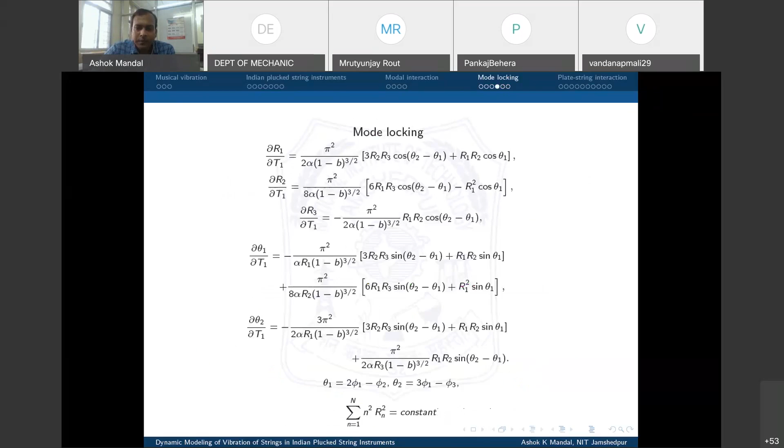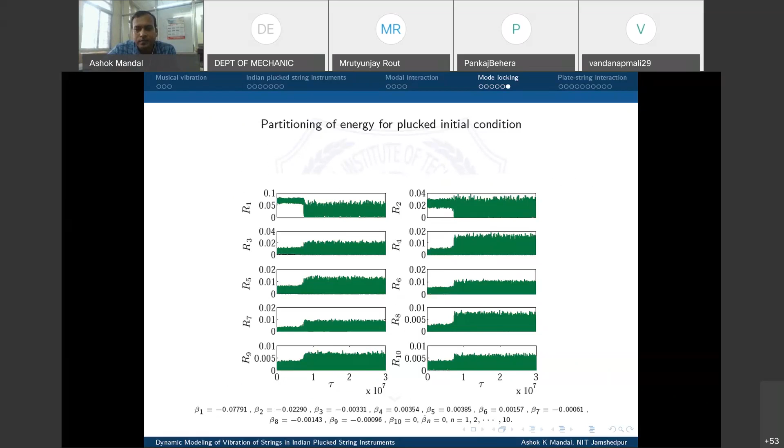Now we must emphasize that this is not a particular choice. We explored the condition of mode locking, and found that the solution naturally goes to that condition - mode locking. When modes get locked, all the higher order frequencies are locked with the first frequency, and obviously they will be harmonic. We did the same analysis taking into account the bending stiffness of the string, and found the same thing - energy gets distributed and mode locking occurs, which makes the sound of the sitar harmonic.

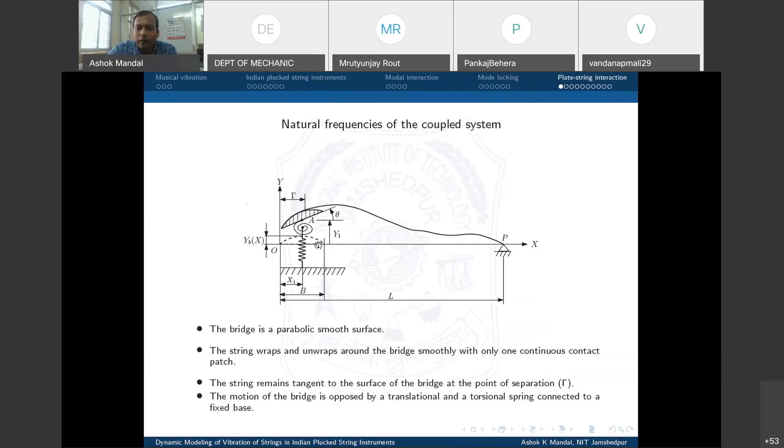Now we move forward to another model. In this model we consider the vibration of the plate. The string is fixed on the bridge, and the bridge is mounted on the plate - here this is a parabolic bridge. This bridge is mounted on the top plate of the sitar. I want to go back to show which one is called the top plate.

In the new model, we assume that this plate can be represented like a translational and torsional spring, because when the bridge is vibrating and situated on the top plate, the top plate restricts its motion. What are the restrictions given by this top plate?

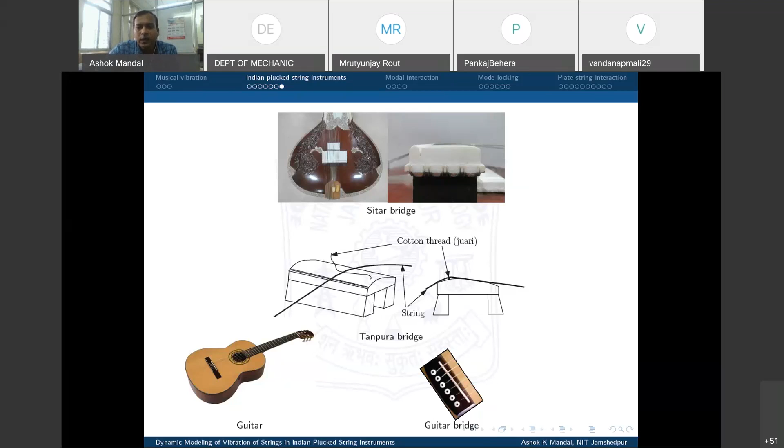The restrictions are rotation of the bridge and translational motion of the bridge. Now we say these two motions, the restrictions of these two motions, are represented by two springs. If we can find out the stiffness of these two springs, then we can have a good model to study the dynamics.

So what we did in this model: we considered the top plate as a circular plate. Although the top plate is not actually circular, to simplify it we considered the top plate as a circular plate, and we found the equivalent torsional and translational stiffness of the plate.

How we did that: for a circular plate, suppose there is a force acting here, and what is the displacement due to that force? The force is a dynamic force, because the string is vibrating, which is a dynamic situation where the vibration depends on the frequencies of the string.

So we consider this as forced vibration. We consider a dynamic force acting, and from the resulting displacement we found out the dynamic stiffness of the plate.

Similarly, we considered two equal and opposite forces acting at a distance, and we took a limit so that this distance becomes zero.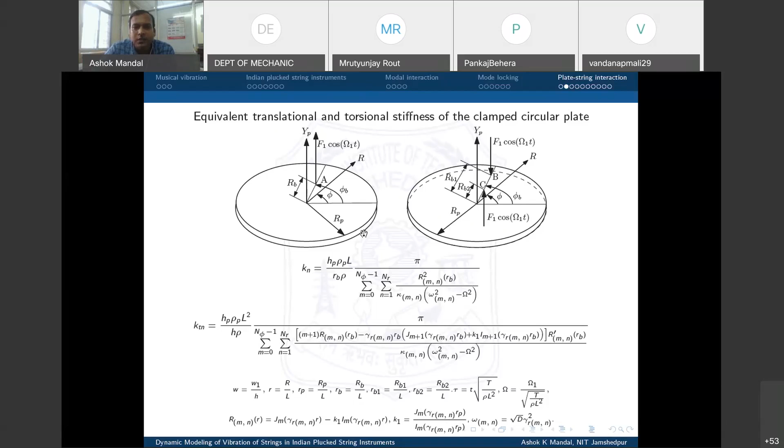Using this, when we analyze, we varied the thickness of the plate and observed the nature of the natural frequencies of the system. We started with a non-dimensional thickness of 0.0035, and then increased the thickness. Look at these frequency ratios, which tell you whether the system is harmonic or not.

Here, omega 1 by omega 1 is 1. You see the second, third, and fourth frequencies are not exactly harmonic — there is some inharmonicity. But as we increase the thickness of the plate, in the second row, you see the second frequency ratio becomes 1.99 or so.

So this goes down, but the other frequencies are still above the whole number.

What does this facilitate? If we go on increasing the thickness and move further, you see all the frequencies become less than the natural frequency of the plate. In the first case, the first natural frequency is less than the first natural frequency of the plate.

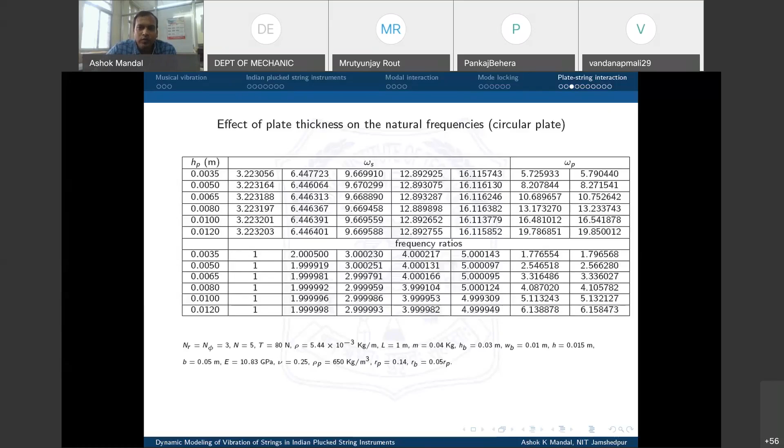Moving forward, for the same system we changed the position of the bridge and found that there is a particular position where the inharmonicity is minimum.

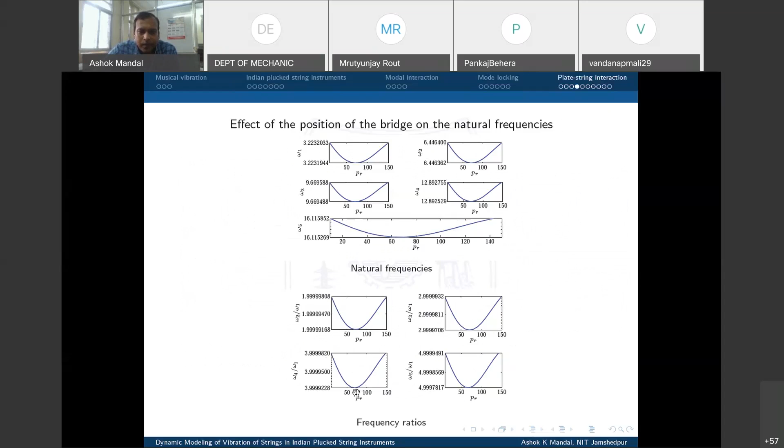We move to the next model. Here, this is also coupled vibration of string and plate. We consider the plate has only one mode. Why do we consider that?

Because the string cannot radiate much sound — much of the sound is radiated by the plate, the structure of the instrument. The string radiates very little sound, and the plate acts like a monopole. So what we did is take the first mode of the plate.

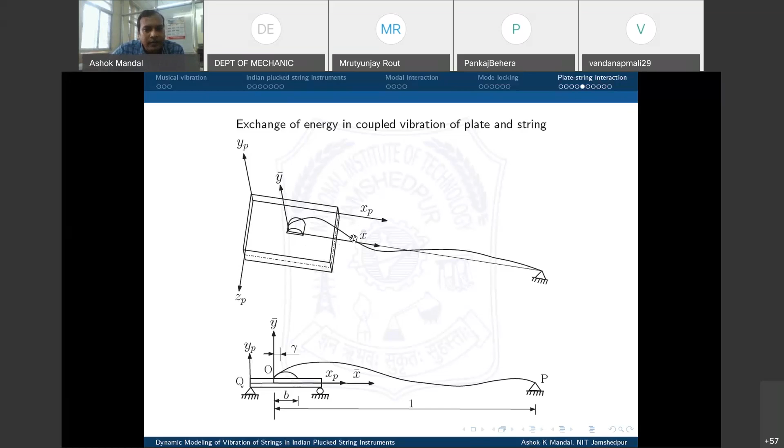We assume that there is only one mode of the plate, and for that mode we derive the equations of motion of the system, where the plate and string are vibrating in a coupled vibration. What we found is that as we decrease the thickness of the plate, the velocity of the plate increases. So if the plate thickness is high, the velocity of the plate is very small. This is obvious.

But why are we looking for the velocity of the plate? Because the sound intensity is proportional to the velocity of the plate. That is why we are looking for velocity here.

In this figure we fix the curvature of the bridge but change the length of the bridge. You see that when we increase the length of the bridge from 0.01 to 0.05, the velocity of the plate also increases. So it shows the dependency of the velocity of the plate on the bridge length.

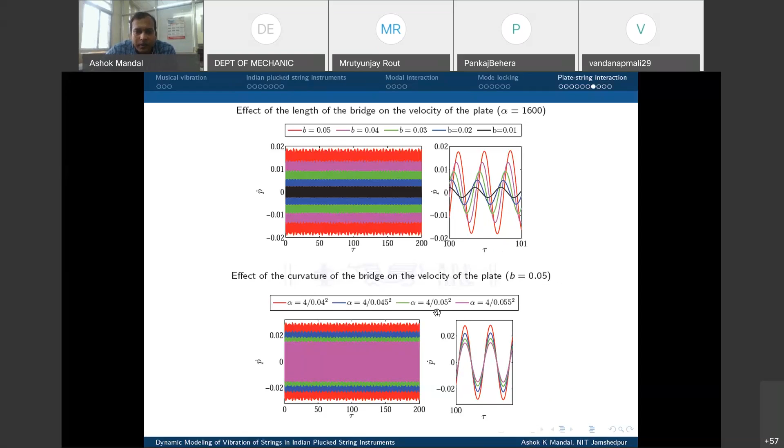Now we fix the length of the bridge and change the curvature of the bridge. The red one is the largest curvature, and if we reduce the curvature, the velocity of the plate reduces.

Now, in our model we incorporate a new thing, the bridge. In the actual case the string is fixed here, and on the other side the string is fixed on something called a langot, where the string passes over the bridge. We have incorporated that, and we found the effect of this extended length of the string, which we are calling the extended length, x2.

We found that for a point bridge, where there is no curvature of the bridge, the velocity is very small. As you change the x2 value, the velocity increases. So what we found is that this extended or curved bridge facilitates a large amount of energy transfer from string to plate, which does not happen if the bridge is a pinpointed bridge.

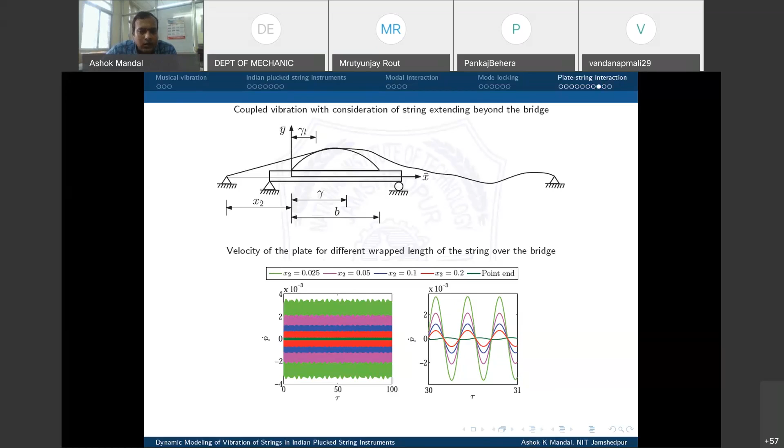So this is our observation from our models.

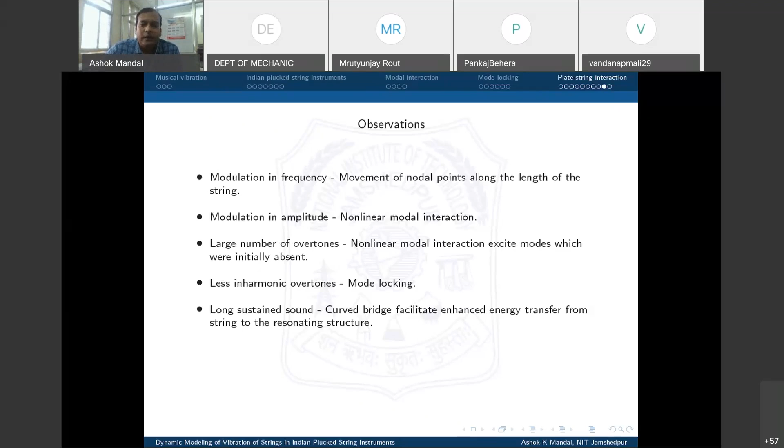What we found in the first result is that the node points move along the length of the string, which facilitates modulation in the frequency. There is nonlinear modal interaction between the modes, which facilitates modulation of amplitude over time. And then a large number of overtones appear, as we discussed, since there is interaction between all modes, so modes absent in the beginning will come because of this interaction. That is why a large number of overtones appear. And due to mode locking, the sound is less inharmonic.

And lastly, the last result we found is that the curved bridge facilitates enhanced energy transfer. If the energy transferred to the plate is higher, that helps the plate vibrate longer. So this is from my side, and if you have some questions, you can ask.

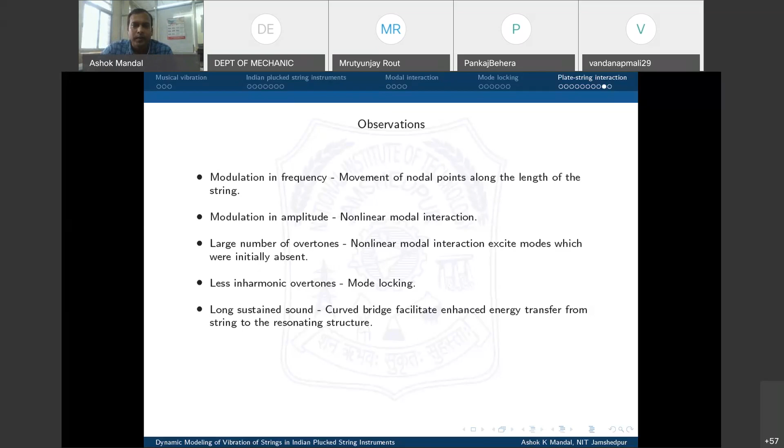Hello. Yes, sir, any questions from the participants? Any questions? Well, I think, sir, they are very hungry, so that's why they are not asking questions. No problem.